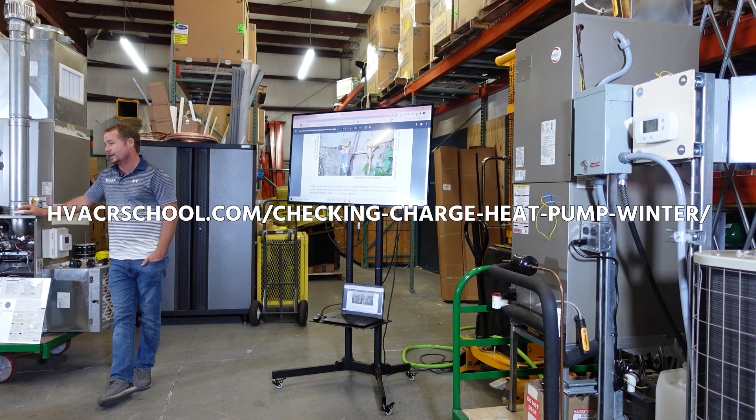Actually wrote most of this article back when I made a little training handbook in my Del-Air days. And so this is actually a picture of the old Carrier heat pump that I had at my house, Minnehaha Avenue. Isn't everybody excited about that? Yeah, absolutely. Wow. So, yeah, really exciting.

So a lot of the rules of thumb still remain. Heat pump, heat mode charging and testing, there are a lot of rules of thumb, and they're not crazy accurate, but generally speaking, our heating season is so short that you're not expected to make huge adjustments, but you want to make sure that the equipment's running properly.

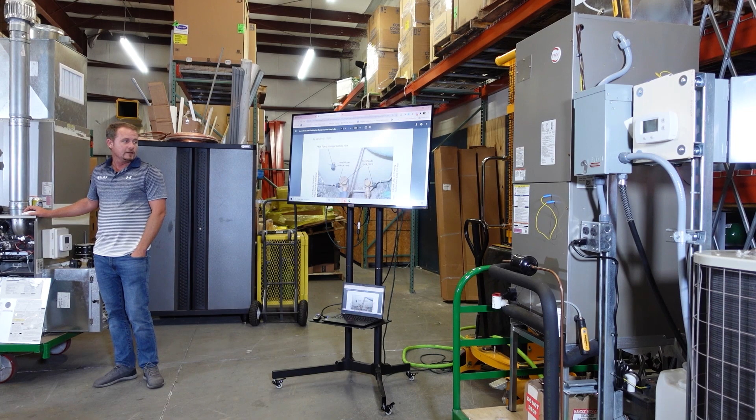But let's start with just connecting to a heat pump in heat mode. This is one of my favorite examples of a system that's kind of interesting to hook up to. So we've got our heat mode port, which is always suction, or common suction is what we call it. So where's that connected in the system, Matt? Reversing valve? It's not on the reversing valve. It's between the reversing valve and the compressor in the suction line.

If you look inside a unit, the reversing valve, the top's by itself usually, it's the discharge line, smaller line, and then the bottom in the center is the suction line. Those connect directly to the compressor. And then it flip-flops those depending on whether you're running in heat or cool, which basically defines whether your indoor coil is an evaporator or a condenser, and whether your outdoor coil is an evaporator or a condenser. So whether it's absorbing heat or rejecting heat.

Obviously, in cooling mode, we want to absorb heat from the inside and reject it outside. In heating mode, we want to absorb heat from the outside and reject it inside, right? That's the idea. When you're running a heat pump in heat mode, you want to connect your low side to that port.

Now, it used to be when you were using analog gauges that it was kind of a big deal if you accidentally hooked your suction gauge to the high side, because it would peg your gauge and ruin it. Nowadays, with digital gauges and probes, it's not going to hurt the probe or the manifold if you connect to the wrong port, because you're not pegging a needle. But obviously, you're going to get an incorrect reading. Go ahead, Bert.

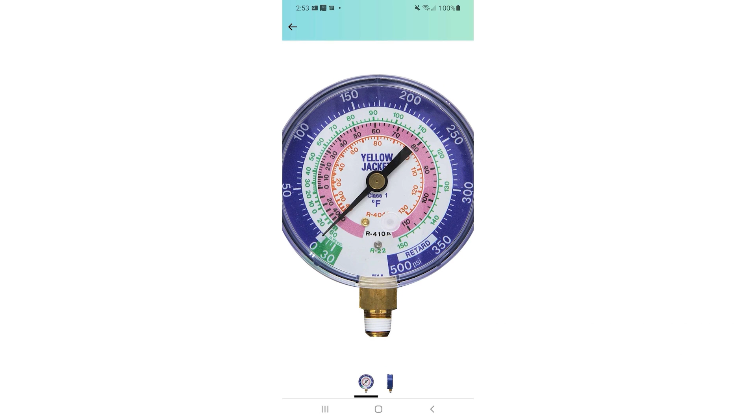Why does it say retard at the very end of the old manifold gauges? Like, if you had it hooked up on that side, it would just throw your dial into where it says retard. Yep. That is actually a real question.

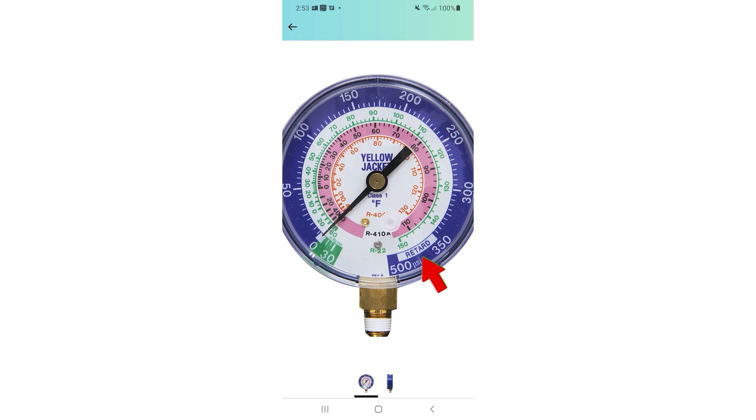So we'll put it up in the video so you can see a picture of what the old suction gauge looks like. It has this spot at the end that says retard, and all that means is that when it gets to that level, it actually has a spring force or some opposing force that keeps it from pegging that needle and breaking it when it overpressurizes.

So it goes to a point, and then it actually has something that kind of prevents it from breaking itself. Does that make sense? So in that case, retard means like to push against, to inhibit. And that's really what that word means, is it means inhibited or to inhibit.

I just thought maybe it was like the manufacturers telling you you're really stupid. We're not making that joke, we already just said that. It's not a joke. I just thought that's what they were doing. You actually thought that's what it was? I did. Oh, you thought that's what it was. When you first started, you really thought that? Yeah, when I first started, I thought that. Okay. I thought they were like, you gotta be stupid.

Whereas it used to be a really big deal, it still matters because you're going to get wrong readings if you don't. But you want to connect your suction gauge. Your suction gauge would generally be hooked to your suction line. And heat pumps, they actually don't call that a suction line technically. Do you know what this line is called technically when your system is a heat pump? What's it called? The vapor line.

The vapor line. And Jim Bergmann was the one who first told me that and made a real big fuss about it. I would just call it the discharge line when it was in heat mode and the suction line when it was in cooling mode, but he insisted it's the vapor line. And that is an accurate name. And why is that an accurate name? Eli, why is it an accurate name on a heat pump to call the large line in between the condenser and the air handler the vapor line?

It always has vapor and it's not always a suction line. Because it always has vapor and it's not always a suction line, exactly. Because the discharge line is fully vapor, the suction line is fully vapor. Discharge line is high pressure, high temperature vapor. Suction line is low pressure, low temperature vapor, but they're both vapor. Vapor in the compressor, vapor out of the compressor, right? So that's why we would call it the vapor line.

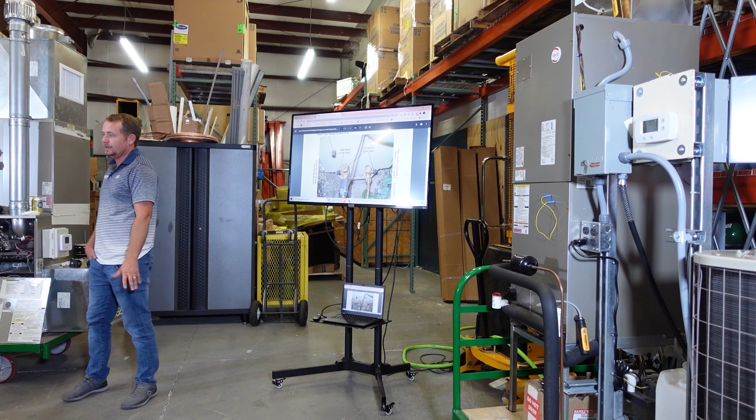Suction here, discharge there. And so people would get upset because they'd say, well, why can't you just leave your high side gauge connected here? Because it's the liquid line either way. So why can I not just leave my high side gauge connected here on this system? You know why, Eric? On this unit, it's the expansion line. Exactly. On this unit, it's the expansion line. It says it right here.

Expansion line in heat. And the reason being is because the metering device in heat mode is located right here. When you get past the metering device, you either call that the expansion line or the evaporator. Right here, this is high pressure. That's not where my port is. Right here is where my port is, and that's no longer high pressure. Now it's also not completely low pressure either. If you ever measure it, it's higher than your suction pressure because it hasn't had a chance to fully expand yet. But it's certainly not high side anymore in heat mode.

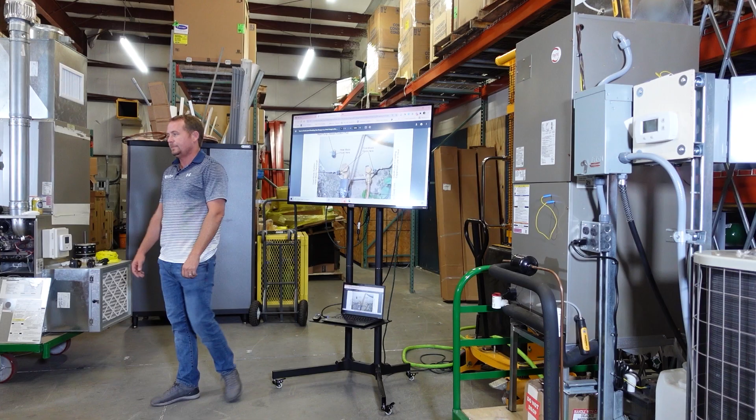Isn't that more of a Carrier thing, to have the metering device outside the condenser? It's very much a Carrier thing. It's going away, so it's maybe kind of arcane, but you'll still see a lot of them out there. If you're working on most brands where the metering device is inside, whether it's a TXV or an orifice, then you could leave your high side connected there. In fact, I would recommend it, because now you can measure subcooling. You can't measure subcooling accurately when you connect to a discharge line, because the pressure in the discharge line and the liquid line are different in heat mode.

Go ahead. How do we know if that's where the metering device is on the system? So it just takes some system knowledge. Obviously, if you've ever installed a Carrier system, you know that you're putting a piston in here. Whether or not you have the old school, this is an R22 system, this is a flare fitting. This is what they used to use.

And so when they came shipped, they would have a cap there, and they'd have a little bag with the piston, and you put it in, or it's behind the cap. Whereas nowadays with R410A, they use a Chatleff fitting with a Teflon O-ring. So just experience knowing that.

So let's say, because I'm used to working on Goodmans specifically, or Tranes, systems like those. We didn't have a lot of Carriers where I was located. So if I were to walk up to one of these, how would I know that I need to connect at this line versus the other line based on the system itself?

So again, I don't know that there is anyone other than Carrier who does it this way. Does anyone else know? I think it's only Carrier. So Goodman will use a heat mode piston sometimes, but it's inside the cabinet. Lennox is pretty much going to always use TXVs. Even modern Carrier systems are going to a lot more TXVs in heat mode inside the unit. So that's going to be self-evident at that point.

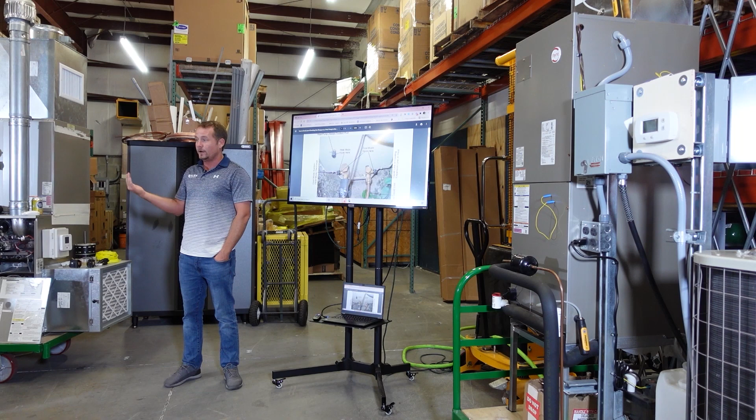But the easiest way to think of it is, there's always a metering device somewhere. So identify where it is. And if you look inside this unit and there's no TXV in there, and it's a heat pump, that kind of leaves right here, and that is right where it is. So it's sort of process of elimination. It's actually an interesting thing, and I'm going to go on a little side note here because it's a similar topic.

You work on a lot of RTUs, small, medium-sized rooftop units, you're going to notice that you trace down your liquid line, and all of a sudden it goes into a header, and then it just goes straight into the evaporator coil. You don't see a metering device. And I remember seeing that, like, what on earth is going on? But actually there's all these little header crimps, and those header crimps act as the metering device.

Because what is a metering device? How would you define a metering device, Joel? Controls the amount of pressure going through. Yeah, it does. It controls the amount of pressure. It's the pressure decreaser. So it can't raise the pressure. All it can do is decrease the pressure. It's just a question of by how much, right?

If it's a fixed orifice, whether it's a header crimp or a capillary tube or a piston, it's only doing it with an orifice, right? And so it's a pressure drop across that orifice that's proportional to the pressure differential. It's really pressure in, pressure out, very simple. So that's what you're basically looking for, where is the metering device, and if you don't find it anywhere else, it's obviously going to be there.

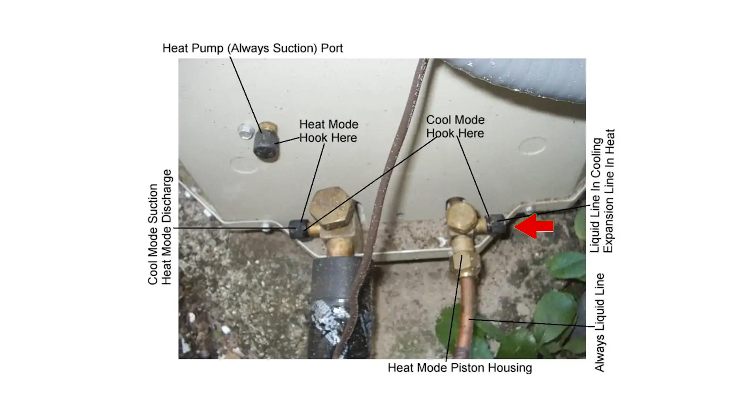But in my opinion, this is sort of a poor design, because this is not a valuable measurement in heat mode. Maybe it could be if you had a chart to reference, but we don't. So it's not a valuable measurement. So you've got to move suction side here, high side here. Pretty much every other system, you can just leave your high side on the liquid line and then connect the common suction. And the common suction is located a lot of different places.

Like Trane, because their reversing valves are generally in between the coil and the panel, which is a really nice place to put a reversing valve. You can actually just attach right above and below the reversing valve, so it becomes more obvious. It is kind of nice. That's one thing that Trane does that I do like.

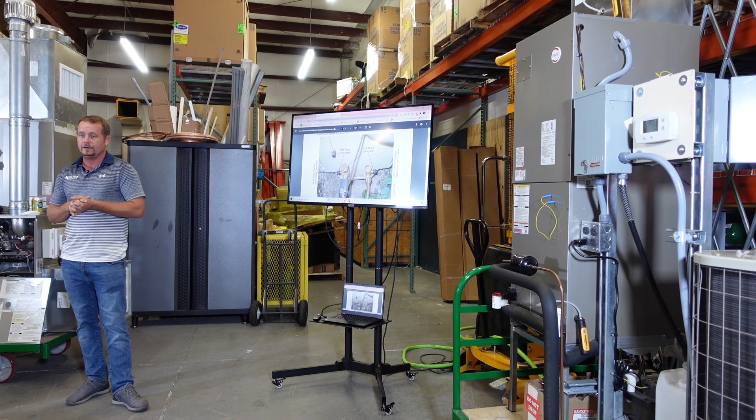Go ahead, Eric. I was going to say, if you're working on this equipment a lot, is there any kind of rule of thumb pressure drop across the evaporator so you can take a discharge measurement, take a liquid line temperature, and try to extrapolate subcooling? Not that I'm aware of. I'm sure if you did those measurements enough, you probably could. Jim Bergmann claims, if I remember correctly, 10 to 15 psi is a standard pressure drop across a residential condenser coil.

So that's the difference between your typical discharge pressure and your typical liquid pressure, but that's not going to hold true for your indoor coil. And again, when we're talking about heat pumps, the language becomes confusing because we can't just call the indoor coil an evaporator coil anymore. You know, it's the artist formerly known as the evaporator coil. Now it's the condenser. So that's why I tend to refer to them as the indoor coil and the outdoor coil, and they're a condenser or evaporator depending on whether you're in heating season or cooling season.

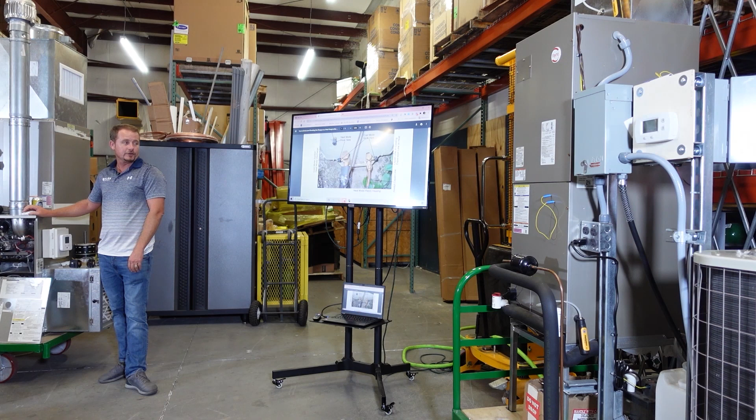All right? Cool. Any questions about that? Any comments? Anything we want to add? So connecting in the right spot, paying attention to where your metering device is. Obviously, I'm not going to read all the text here, but we're going to hit some key points here. One of the most important things, we're going to go to step 1 and step 2 here.

Step 1 is if you're running a system in heat mode and it's a heat pump and there's any frost on the outdoor coil, get the frost off before you take any measurements. Because frost, obviously, is going to impede your airflow and it's going to mess up your measurements. You can't compensate for that. Go ahead, Bert. How would you get the frost off, Bert? I would energize the reversing valve. Okay. Run it in cool. Yeah. And get the frost off that way. Probably the easiest way. Yeah.

Yep. So first do that, and then next check all the obvious things. Before you do anything, especially before you start messing with charge levels on a system, or you condemn any parts, check everything that's obvious first. This is where, and I beat this dead horse a lot, we talk about wide, narrow, wide diagnosis. So when you walk up to a system, it doesn't matter if it's a heat pump, straight cool, gas furnace, heat mode, cool mode. When you walk up to a unit, first take a really broad view.

Because what I see a lot of newer techs do is they'll go up to a unit and be like, oh, the evaporator coil's dirty. Mrs. Jones, you need to clean the evaporator coil, right? And then they didn't notice that the capacitor had failed and the compressor had blown a terminal and all this other stuff. So you approve the evaporator coil cleaning, that gets done, and oh, by the way... that sort of thing happens a lot actually. And it's not wrong, because you do want to pay attention to the fact that the coil needs cleaning, the blower wheel is dirty, the filter, all that. But you've got to do all of it first. You can't just do one, stop, and quote the customer.

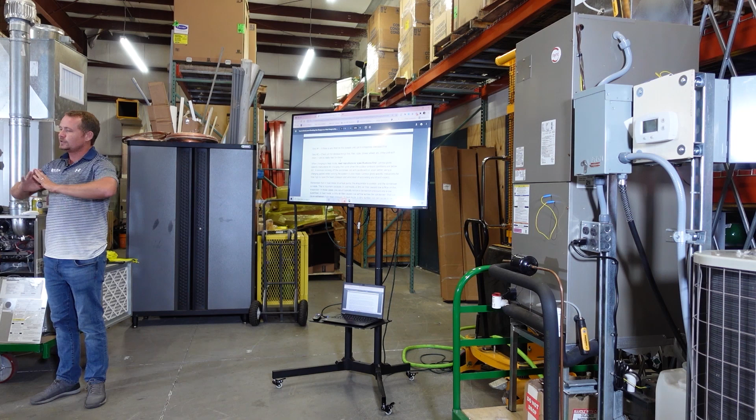So that's why we start wide. We start by looking at everything, taking note of standard stuff: filter, evaporator and condenser coil, blower wheel, so on and so forth. Anything else that you can visually notice about the equipment. Go through all that and then find the problem. So that's where narrow comes in. Start wide, go narrow, find the thing that's keeping the equipment from working, quote the customer appropriately, always preparing them that you don't fully know until you do the testing once you get it fully operational.

So just remind them, this is the battery of things that we're suggesting, bundle, whatever. This is the main problem. Once I get that all done, I'm going to run and test the equipment, check everything, and make sure there are no additional problems. Makes sense? That prevents a lot of heartache, especially with the impulse we have to rush to the customer and say, I found the problem, it's simple, it's a capacitor, right? Or I found the problem, it's simple, it's a drain. That sort of language gets us into more trouble than anything else we do in the field.

Because for whatever reason, especially as residential service technicians, we want to get in and out. I don't know why. We don't want to be with that one customer very long. We want to get to the next job. It's a really bad impulse. In heating season, it gets worse because we're not used to it as much. We don't have as many reps on it. We don't have as much experience with it. So you can make more mistakes.

When charging in heat mode, read your manufacturer specs first. Because even within brands, there's going to be variation on heat pumps, depending on the compressor technology, depending on coil size. There's going to be a lot of factors that impact how you charge these things. We got some rules of thumb, but they're just rules of thumb. They're just there to kind of say, all right, I can tell that the system is basically working okay with no major, huge glaring issues, but it's not the best way. The best way is to follow the manufacturer's specifications.

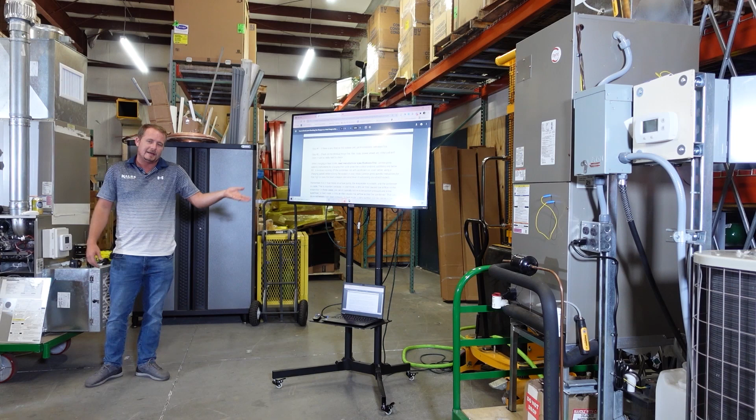If I'm going to do a significant repair, like a compressor replacement or something like that, then I'm going to look at line length and actually weigh in the charge appropriately. And then I'm going to do my rule of thumb tests. So I don't love Lennox's way, but it makes sense. I understand why they're doing it. It's just highly variable and it's hard to pin down.

What were you going to say? If you don't have cardboard, you can use a trash bag too. And you can just start creeping it around the condenser until you get the appropriate amount. Yeah, actually that's a good idea.

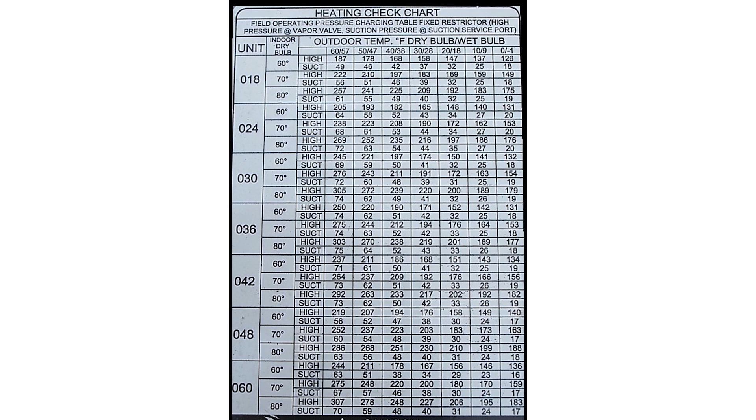So this is an old school heating check chart that Carrier used to have. I inverted the colors just to make it easier to read. And so here, you're literally just looking at your dry bulb, wet bulb being the more accurate number here. What is the outdoor wet bulb temperature? What is the indoor dry bulb?

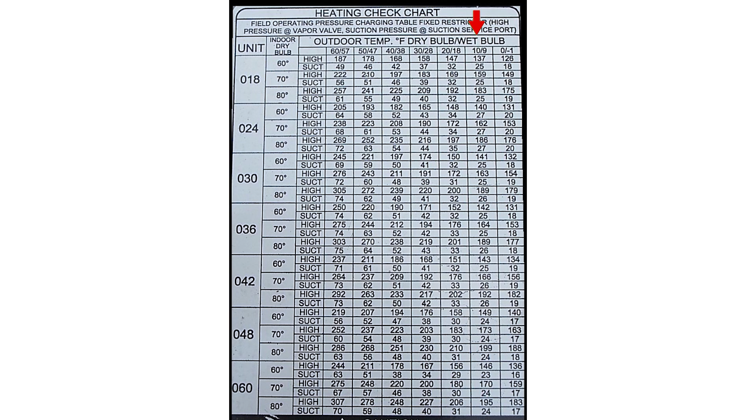You go across, what are your pressures supposed to be? And again, even that is kind of a rule of thumb. I mean, it's not going to be super exact, but the manufacturer put it out. So yeah, it always frustrates me when people use rules of thumb on a system that has a chart like this. If it's got a chart like this, use the chart, right? It's a piece of cake.

Now, one of the biggest questions is when do you use heat mode charging and when do you use cooling charging techniques? Does anybody know where the cutoff line is, temperature-wise? When do you check in heat mode? When do you check in cool mode? Does it say on here? It usually says, I think 60, 65. Yeah. 65 is typical. It's not always 65. 60 to 65 is typical. So when it gets below 65 degrees outside, that's when you're going to follow the heat mode test or low ambient check guidelines.

Obviously, if you're at 65 degrees, you probably just have to check it in both modes. And really, checking it in both modes when you're in the edge season is your best bet anyway. If it's anywhere from 60 to 70 degrees outside, checking it in heating and cooling, a little bit of runtime is going to be your best bet.

Next rule of thumb, the good old 100-degree over ambient discharge rule. So those of you who have been doing this a while, do you like that rule of thumb? Bert, Sam? I hated it at first. Okay. I found it was more accurate when I actually let the system run a lot longer than I realized. Yes. Very good point. I never saw any consistency, and I didn't realize, 25 minutes, maybe longer, it has to go.

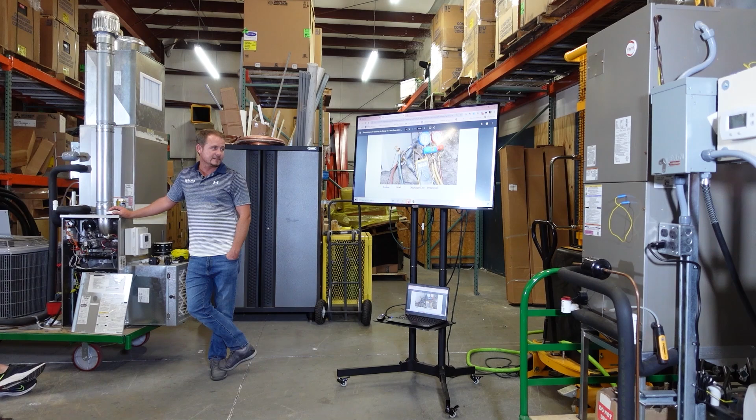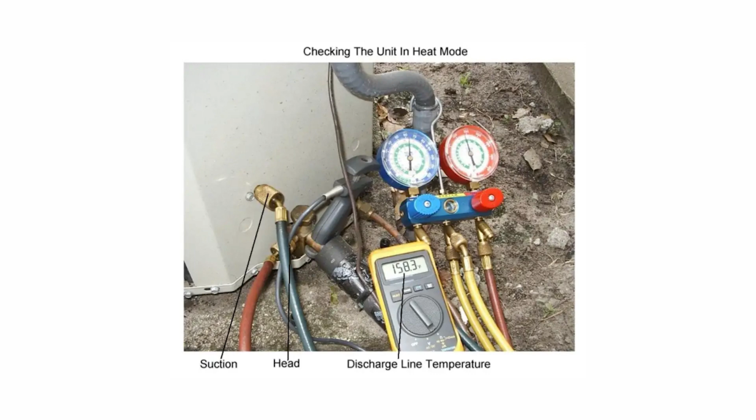All right. So this is an example of me making this test with my old Fluke clamp. You don't even need gauges. It's just a measurement of your discharge line, the artist formerly known as your suction line, your vapor line, and comparing it to outdoor temperature. So if it's 58 degrees outside, that would be an appropriate temperature. And as it turns out, that is about what it was that day, 60 degrees or in that range. So that is an indication of a system that's at least close to proper operation.

I don't know, I zoned out for the last 30 minutes, but if you said this already, just let me know. Okay. But you have to inspect the system first. Like if you have clogged condenser coils, and now your evaporator, you can't compare it to the outdoor temperature because you don't even have a clean coil. Did I mention that first? Yeah, filters. I did.

Can we go back? Weren't you sitting right here when that happened? Yeah, and I gave input about it. Did you? Oh, okay. But then you just forgot that it existed. It just needs to be mentioned again.

You can't just go off of the outdoor temperature. Correct. You have some dirty coil or a filter inside that's really dirty. Right. Other things that are affecting the system in an extreme way. Absolutely. Bert, beautiful.

All right, the suction pressure evap DTD rule of thumb. So back when we worked on R22 systems, there was just this weird coincidence that your suction pressure on a properly charged system would be about the same as your outdoor temperature. So I want to say this again, it's just a fluke, that if it was like 50 degrees outside, your suction pressure on an R22 system would be about 50.

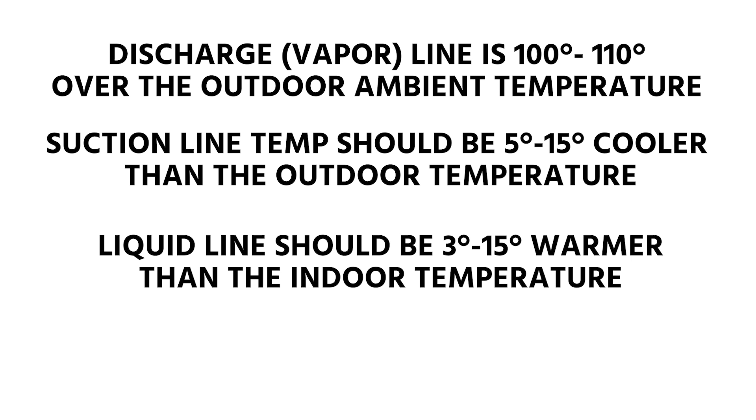Your suction line temperature should be 5 to 15 degrees cooler than the outdoor temperature. Now this is taking into account superheat and my rule of thumb. Liquid line should be 3 to 15 degrees warmer than the indoor temperature. And delta T indoors, because this is the one that a lot of people are like, what should my delta T be? What should the difference be between my return and supply air temperature inside? It's going to vary wildly.

Like wildly, because not only are there design differences in equipment, but there's also these huge swings in ambient conditions that you could be operating in. So you're going to see a much higher delta T in cases where you've got an evaporator coil that is small with low airflow and when it's warmer outside. And then the opposite is true in the other way. So it's just not that valuable.

If you really want to do a very thorough job, you can do delivered capacity. Delivered capacity is easily done. So you take a digital psychrometer in the return and supply, hook up to measureQuick, and you'll get a pretty good indication of what capacity that system's producing, but that capacity is going to vary a lot too, depending on what the outdoor temperature is. So you've got to kind of take it with a grain of salt or reference a manufacturer chart in order to know for sure.

Imagine using a chart and measureQuick together, like a manufacturer chart and measureQuick together. Like imagine how good you could be as a technician. Yeah, why are you saying that? This feels like a setup. I'm just imagining. Oh. I tend to imagine. I can only imagine. Yeah. MercyMe, that bad boy. You know what I'm saying?

All right. So, any questions about any of that? Do you need a hygrometer when you're doing that? No, you don't. It's just that's what's going to connect to the app that's going to make it the easiest to do. But no, you wouldn't. You could use regular thermometers for that matter, because you don't have a latent change across a condenser coil. Right. Because you're not dropping water in heat mode.

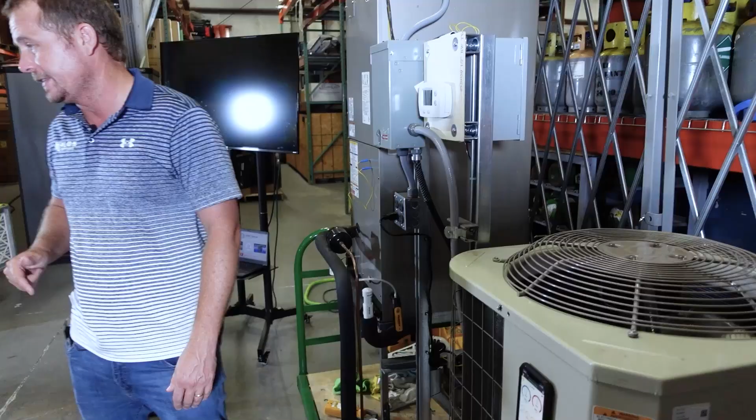All right, so right now we're in cooling mode. If this were a Lennox system and we were wanting to drive up our head pressure in order to test it in cooling mode with it being cool outside, we would use the charging jacket. It's not something we use a lot, but I want us to go ahead and just experiment with using that real quick. So I'm gonna give it to Joel to assemble. So if you read the instructions on it, it says only use on TXV systems. So this is for systems that you're going to be setting the subcooling in.

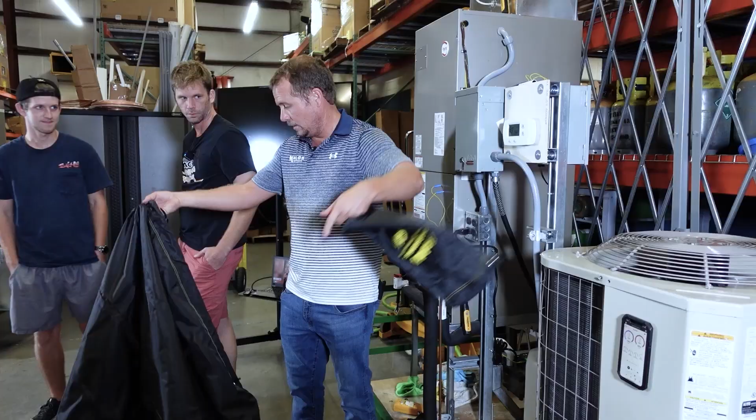This one's never been out of the bag before. So all we're going to do is hook these around the outside, like Trailer Park Girls.

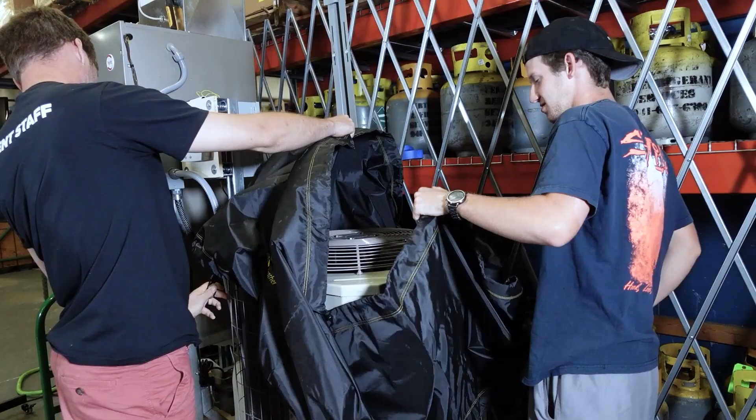It's an Eminem reference, okay? Huh? That's how the song goes. Trailer Park Girls go around the outside, around the outside, around the outside, yeah. The bottom is maybe one more. Probably not, but I don't actually know that they're not. The top. There's no impure thoughts for me.

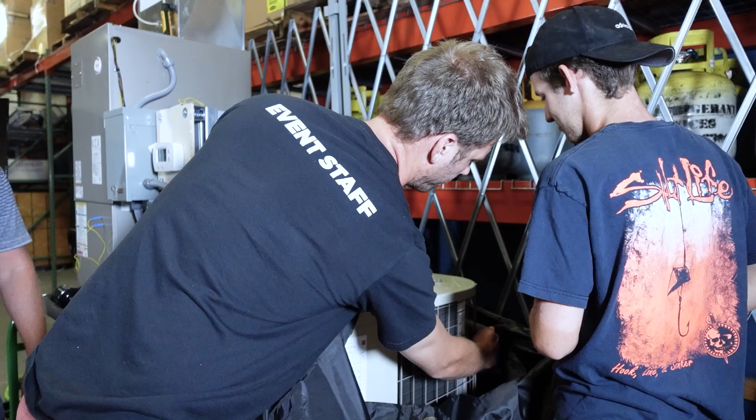Restricts airflow, and you can adjust it.

Are you? Okay, all right. All right, so, it's the worst jacket I've ever used. Huh? It's the worst jacket I've ever used. It doesn't keep you very warm. All right, so let's look at, this is Eric's. This is scary. Never grab another man's phone and just start flipping through it. That's something that I've learned a long time ago. Andrew Greaves about took Leilani's head off. He was showing her something on his phone, and rather than just looking at it, she grabbed it, and he's like, what are you doing?

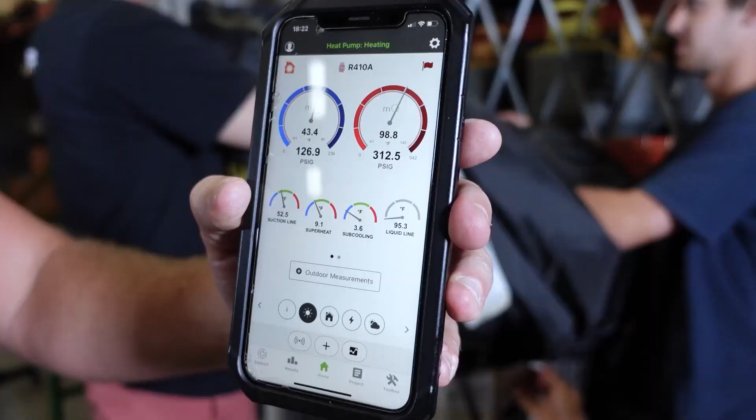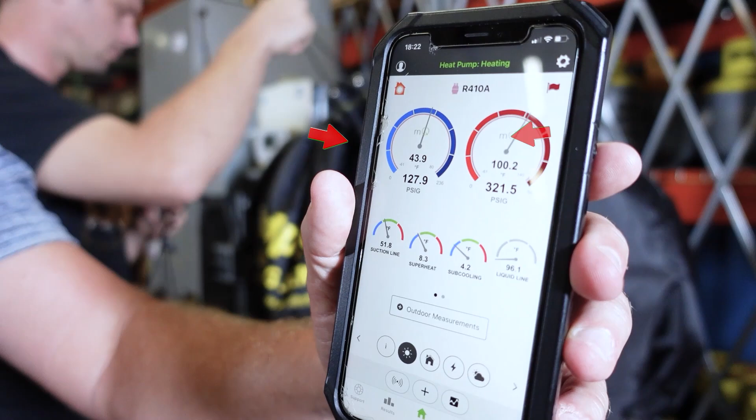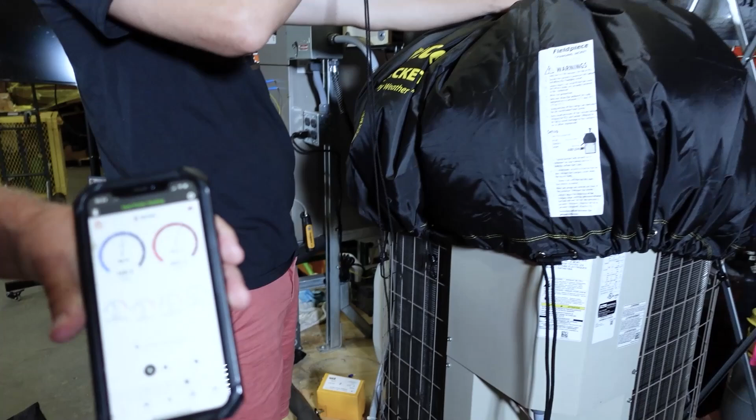All right, so take a look at this. So right now we're at 99 degree saturation on the liquid side and 43 degree saturation on the suction side, which is fairly to be expected. But if this was a cold day and we wanted to drive up our head pressure, we can kind of keep this here. Where do you want that? You want it more loose so air can actually escape down the sides. So you're actually dumping hot air down the side.

Yep. And it says here what you would do. So in this one, you only use when the dry bulb temperature is between 37 and 70 degrees. And you're supposed to keep it below 500 PSI for an R410A system. It says here, adjust the restriction of the charging jacket until the difference between the high side and the low side pressures is between 160 and 220 for R410A. So it gives you specific instructions on how you would use it, and then you're going to check your target subcool.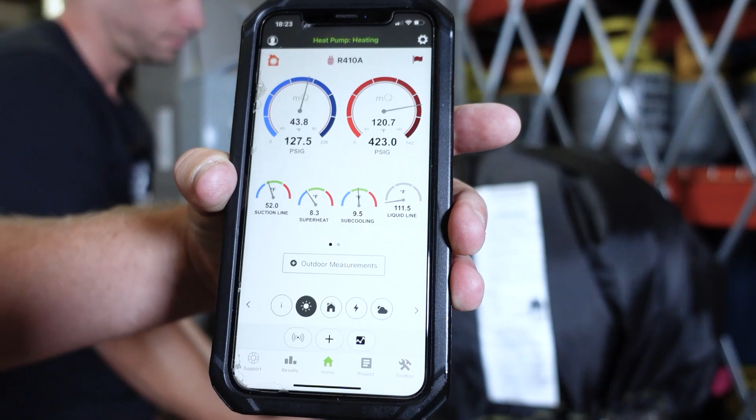Yeah, you see now we're at 100. We're at 117, 119. We're really getting there. So it's just more of a controlled way. Now again, we're running in cool mode, so this isn't really a heat mode test. This is just a way to check the charge in subcool with a TXV under certain load conditions, and it's actually fairly easy to do, so that you don't have to try to set a charge in heat mode. We're already at 450 PSI, so if you adjust it out, then you can get that head pressure back down again.

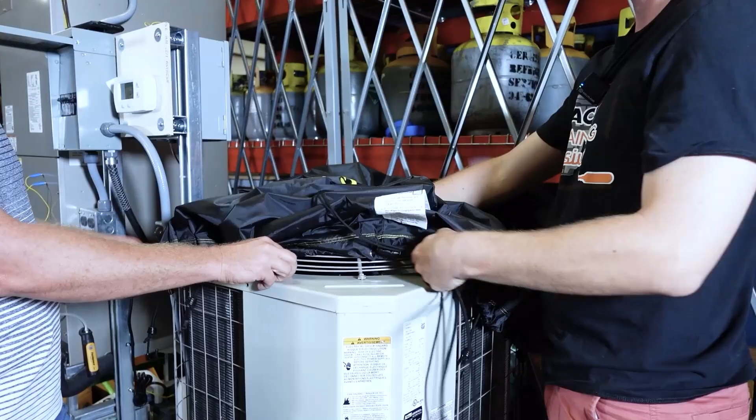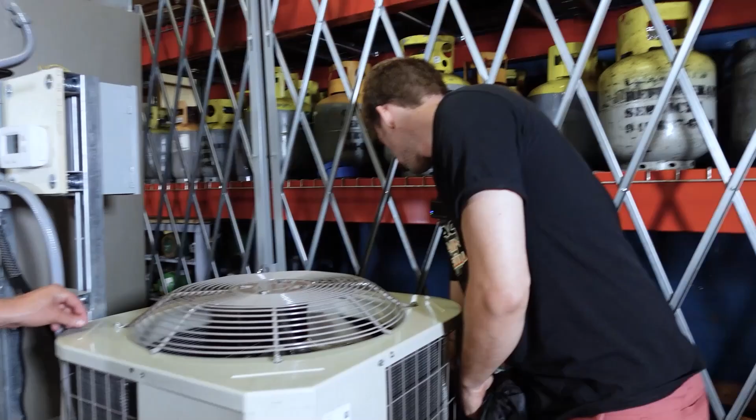All right. So now we get the point. Let's go ahead and shut it off. And let's look at our defrost and inside our condenser a little bit. We'll talk a little bit about that. Just leave this here? No, we just take it off. Okay. That was all, just demonstrating it. I think it's a pretty good design, actually. It's easier than a lot of your options.

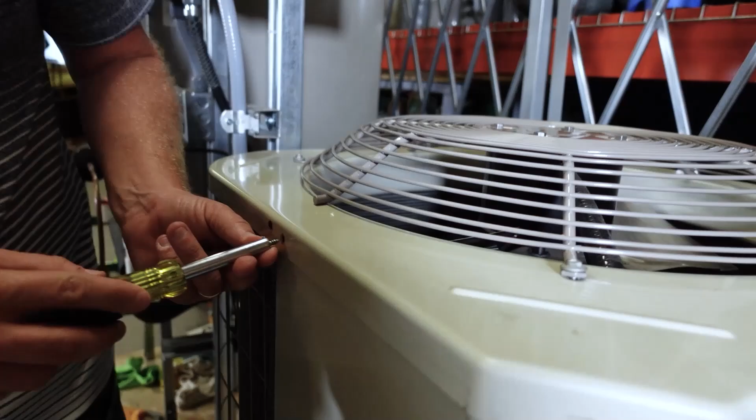All right, so first question is, why does a heat pump need defrost? But why will it frost up? Yeah, why would it freeze? But why? Poor design? Suction saturation drop. Okay, so what do I call the evaporator coil? What's my kind of simplistic name for the evaporator coil? The heat absorber, right? And what direction does heat move?

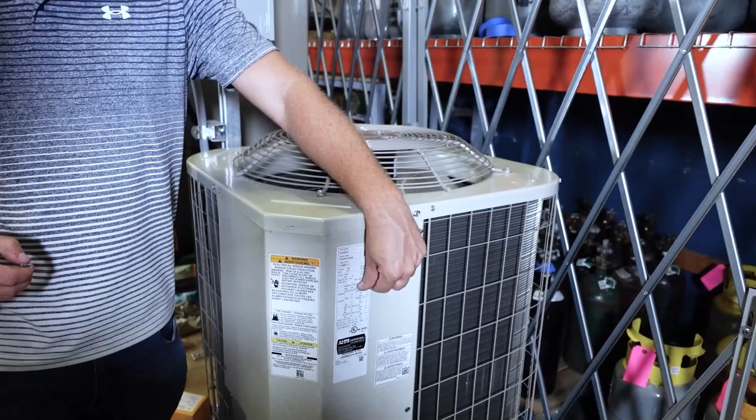What direction does heat move? Hot to cold. It goes from higher temperature to lower temperature, right? So if I want to get heat out of the outside air and I want to get it into the evaporator coil, and the outside air is 30 degrees, what do I have to do to the evaporator coil in order to get heat to move into it? Get it below 30. I got to get it below 30 degrees, right? I have to get it below 30 degrees.

And if the evaporator coil is below 30 degrees, because this is the evaporator coil in heat mode, right? What's going to happen to the surface of the evaporator coil eventually? It's going to freeze. And what are the factors that dictate how fast and how much ice is going to build up on that evaporator coil? Outdoor temperature. What else? Outdoor humidity and airflow. Outdoor humidity, airflow, runtime. Right? You got a system that's running a lot, it's going to be much more prone to freeze up than a system that's not running a lot.

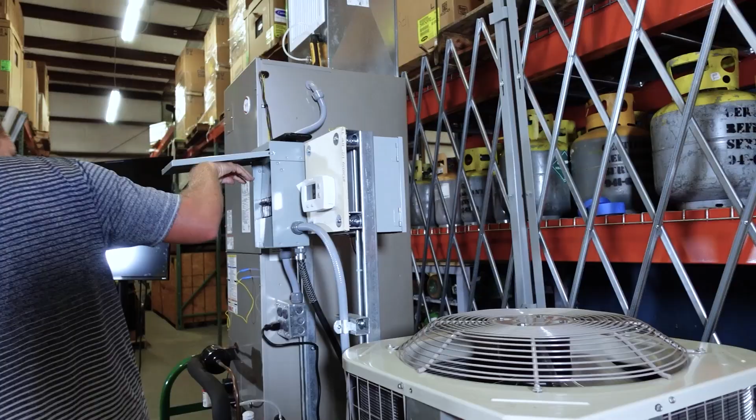Stands to reason. What if it's raining? You know, what if there's like a light rain or something like that? And that could add to it, because now you actually have liquid water that's impacting the coil. If it's raining hard enough, it actually might prevent it from frosting, but depends on the temperature. So in Florida, we don't see a lot of sub 40 degree temperatures. It's not common, but it does happen.

And when is it the coldest? In terms of nighttime. But what part of the night tends to be the coldest? Nighttime. Before the sun comes up. Right before dawn. Right before the sun comes up. Yeah.

Florence and the Machine said it well. It's always darkest before the dawn and coldest. She didn't say that, but she meant it. Wow. She meant it. Yeah. Well, that was before she met the machine. Actually, that is the machine. The machine. Sorry, I'm a little slow right now. Yeah, it's the machine.

So anyway, that's what tends to happen: 4 a.m., 5 a.m., somebody hears a weird sound. They notice their house is a little cold. They look outside, and what do they see? Does anyone know? Steam. They see smoke. So they see the white billowy smoke, and they say, oh my gosh. They run out, and then what do they notice? They might see ice, but they're gonna notice that the fan's not running, right?

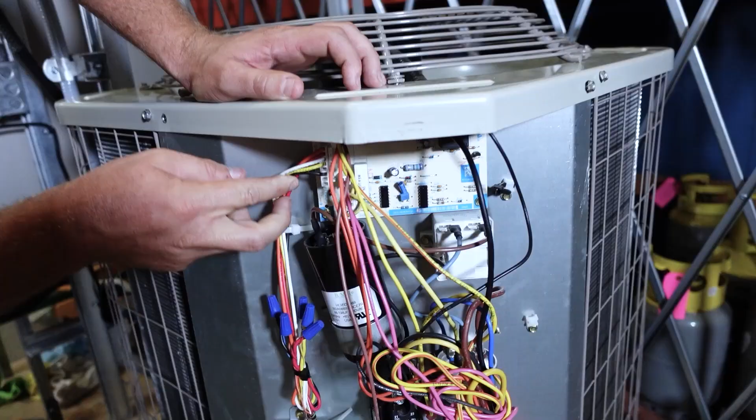Here you can see we've got our speed up, and that basically just speeds up the time in between checking. We've got a 30, 60, 90-minute pin here that we can select, but that's how you test on a Carrier. On something like a Trane, you literally just jump between and force a defrost, okay? But back to what happens during defrost, because I don't think I finished that story yet.

What happens during defrost is it shifts itself into cool. So once it says, I need to defrost, it shifts itself into cool, shuts off the condenser fan, turns on the heat strips. And turning on the heat strips is actually one of the more interesting things it does, because it turns them on by backfeeding them from the defrost board. With a heat pump you really almost have two thermostats. You have the thermostat inside, but your defrost board kind of functions as a thermostat because it can also turn things on and off. Specifically, it can turn off the condenser fan and turn on your heat strips by backfeeding the white wire.

And energize the reversing valve. And energize the reversing valve, yeah, to throw it into cool mode. That's on your typical Carrier, Trane, Lennox, Rheem. This would be the opposite in some cases. Would it energize Y? Would it energize Y?

Let's say you drop the call inside right after you went into defrost. No, it doesn't. I don't know of any that actually energize Y themselves. I'm gonna have to test it at some point. I don't think so. Well, it'd be easy to know, because does Y go straight to the contactor, or does it go to the board first? It does go to the board first in a lot of cases, but that's for time delay. It is not energizing Y for the purpose of defrost. It's energizing orange, but if you lose your Y call, it's just gonna shut off.